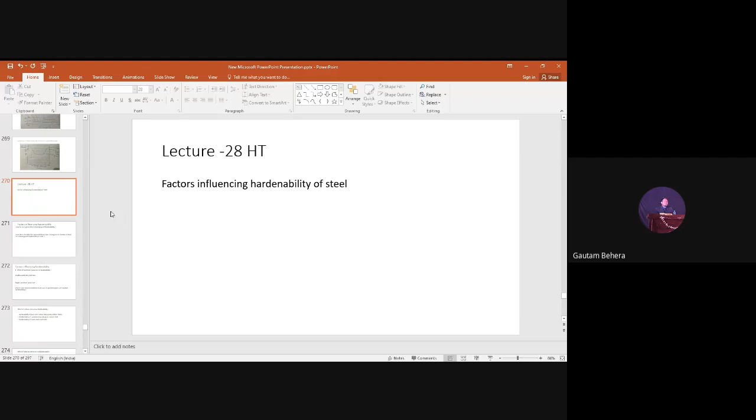So first, how do we say a given steel has good hardenability? Suppose I hand you a steel and ask you to tell me whether it has good or poor hardenability. Obviously the first thing you have to do is take the steel to the austenitizing temperature, meaning you convert the entire initial microstructure into a homogeneous austenite phase.

After that you have to cool it. It depends—you can give quenching, slow cooling, or intermediate cooling, and then check the microstructure from the surface to the center. You can make cross sections, cut it into pieces, take sections from the surface, intermediate portions, and center portions, and check whether martensite has formed everywhere—at the surface, intermediate portions, and center.

That means I can say the steel you received from me has good hardenability—it is showing good hardenability characteristics.

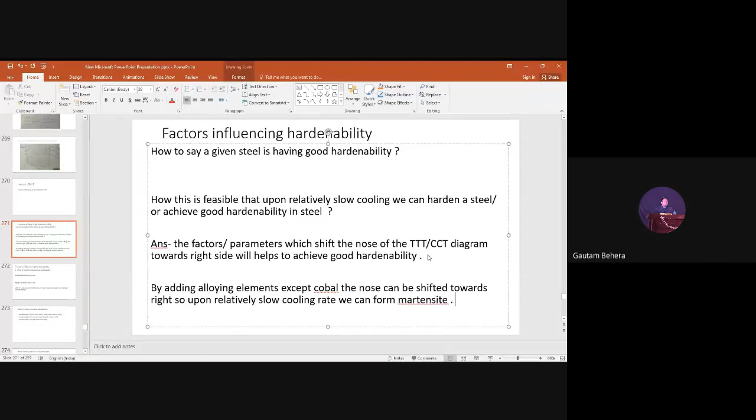So in other words, what I can say in terms of this critical cooling rate - will it become slow or high if you are adding lots of alloying elements? Slow. Yes, obviously the critical cooling rate will become slow because the nose is moving towards the right side. So if you draw a cooling curve, it will not easily touch the nose of the curve, because once it touches and crosses the nose of the curve, then transformation of austenite to perlite may happen. So we have to suppress the perlitic formation also.

Okay, so next is factors influencing hardenability. First is the effect of austenite grain size on hardenability. This is one of the important factors that affects hardenability. We have an initial microstructure and we convert it to austenite first. In most heat treatment, our first job is to take the steel to the austenitic temperature to make it homogeneous austenite. Austenite basically starts nucleating at the interface of ferrite and cementite if present. So more surface area means more rate of nucleation of this particular thing.

So how does austenite grain size affect hardenability? We can have smaller austenite grains, or we can have bigger or coarser austenite grains - that's the technical term. If we have smaller austenite grain, the hardenability will be poor. But if we have coarser, bigger austenite grain, we have good or high hardenability.

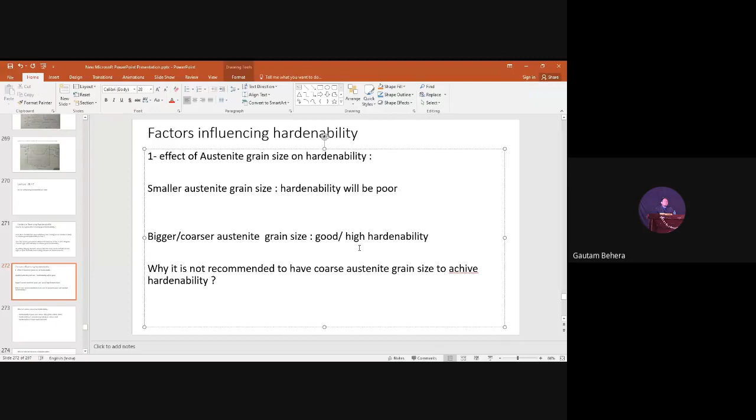So if perlitic transformation is easier, austenite will easily transform into perlite, which suppresses the formation of martensite. Similarly, if we have coarser austenite grain size, that means we have fewer grain boundaries, very minimum grain boundaries. So perlite transformation will be suppressed and martensite transformation will be easy. So in one word I can write...

Nucleation and growth easy - it suppresses transformation of austenite to martensite. The same answer you can write here.

Then next question: why is it not recommended to have coarser austenite grain size to achieve good hardenability? So what's the conclusion? If we want high hardenability characteristics in the steel, then we have to go to a high temperature, because that gives us coarser austenite grain, and with coarser austenite grain, transformation of austenite to martensite will be easy, because the suppression of austenite to perlite transformation will occur due to the coarser grain size.

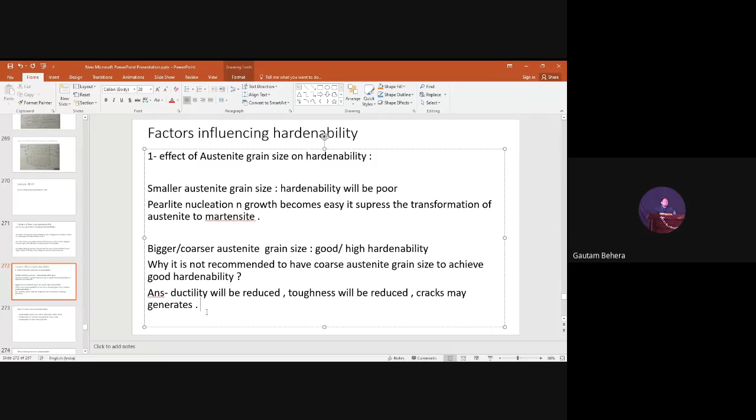Is it okay now? Okay, sir. Okay. Sir, yes.

Sir, if we have problems with both fine grains and coarser grains, then what can we do? When I told you about grain size, yes sir, you can have an optimum grain size so that you can maintain both properties. You can maintain toughness also, you can maintain hardness and strength also.

See, you understand, strength and ductility are always opposite. If you always want to increase the strength, what will be the problem? The ductility will be reduced, and that will affect the toughness property. Obviously, the final service application is important, because, for example, car bodies, right? In car bodies, you always want high toughness and high strength also. So that is why you have to maintain a fine grain anyhow.

It is okay, you have to maintain a fine grain over there. If you are not maintaining fine grain, if you are maintaining coarser grain, ductility will be reduced and toughness will be decreased. But on the other way, if you are increasing high strength, the chances are that toughness will also be reduced. So depending upon the application area, actually we want different things.

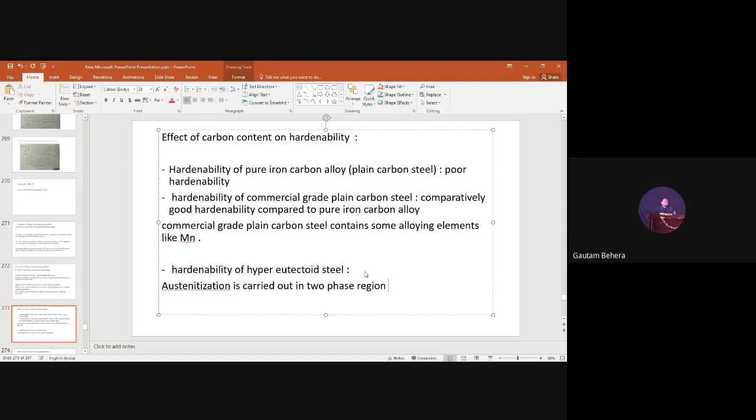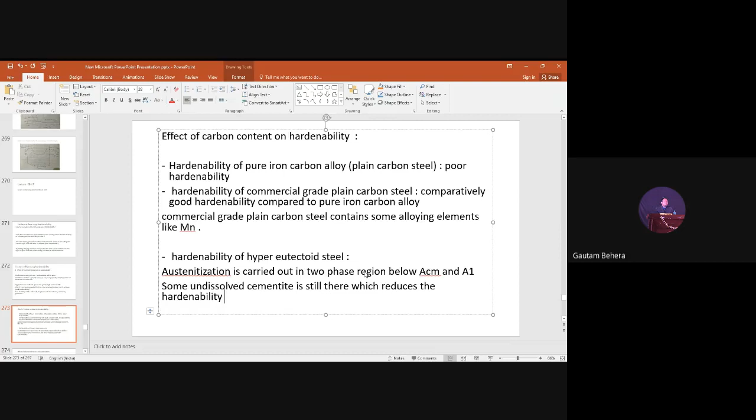Austenitizing is carried out in two-phase region, that is below ACM and above A1. That means in between the lower critical temperature and upper critical temperature, that is ACM. So some undissolved cementite will be there. Carbide, that is iron carbide, is still there, which reduces the hardenability. This is the answer.

Next is the effect of alloying elements on hardenability. We have already discussed this: except cobalt, other alloying elements present basically shift the nose of the CCT curve or TTT curve towards the right side. So even doing relatively slow cooling, we can easily get martensite, so we can have good hardenability characteristics. That is the answer.

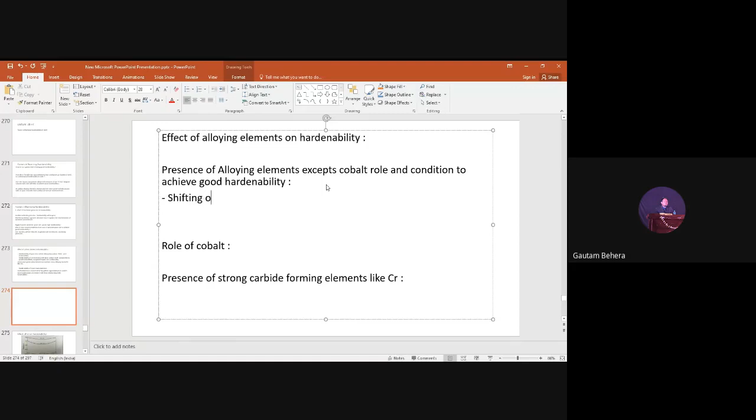So presence of alloying elements except cobalt is the role and condition to achieve good hardenability. One point is the shifting of the nose of the TTT curve or CCT curve towards right. That is the answer.

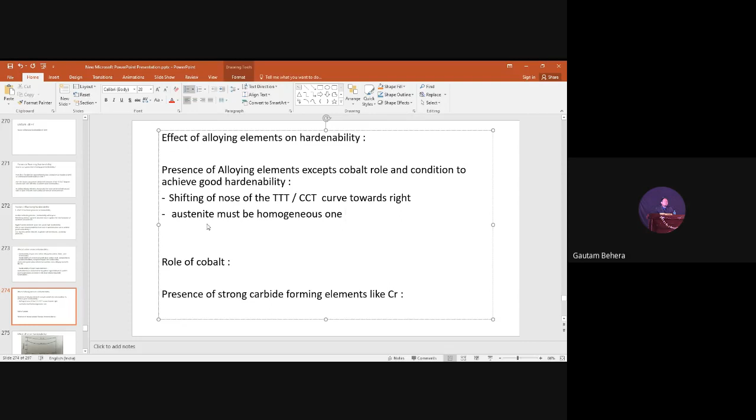Second answer is: then it is written as condition to achieve. It doesn't mean that you have alloying elements in the steel except cobalt and you are automatically getting high hardenability. That is not the thing. The other important point to notice is whenever we are doing austenitization, this austenite should be homogeneous. If it is not homogeneous, and some alloying elements are there which form carbides, nitrides and all - if there are any ferrite stabilizers like chromium, niobium, vanadium, titanium, they form strong carbides and are not easily soluble in the austenite phase. Even if they are soluble, the solubility is very slow. So if the austenite is inhomogeneous, hardenability will be poor.

In other words, I can write: inhomogeneous austenite reduces the hardenability of the steel.

The reason you understand, because of the strong carbide nitrides or any non-metallic phases will be there which are not soluble easily, or it is taking time. So austenite becomes inhomogeneous. Then role of cobalt.

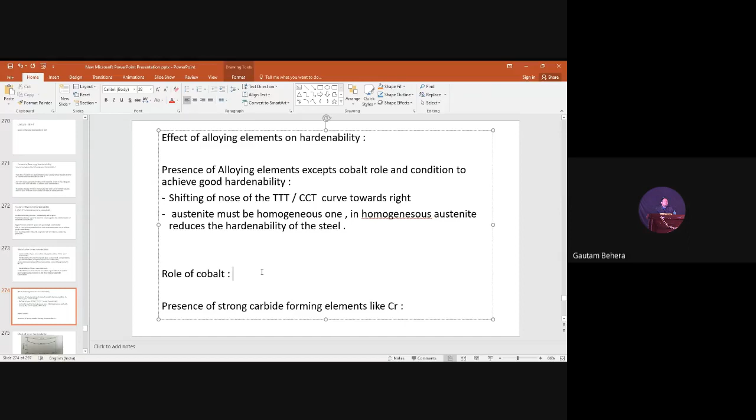Cobalt, already I told you, is the exception which does not shift the nose of the TTT curve, CCT curve, towards right. So if cobalt will be present, what I can write? Here I can write first thing is it does not shift the nose of TTT.

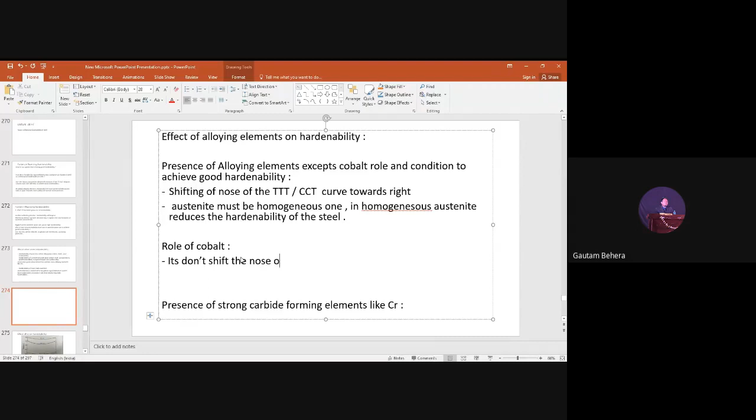And what happens also, due to which it promotes the nucleation of pearlite, nucleation and growth of pearlite.

So you understand what I can write? Martensite transformation suppressed, because pearlite formation will be there, so martensite transformation will be suppressed. So if cobalt will be there, if you have a steel containing only cobalt, it will never shift the nose of the TTT curve towards right.

So that we cannot easily get martensite upon slow cooling. That is one part. Second part is this cobalt also helps in the nucleation and growth of the pearlite phase, which is a diffusion based transformation. So if diffusion based transformation starts, martensite formation will not be easy, or it will be difficult, or it will be suppressed. This is the answer.

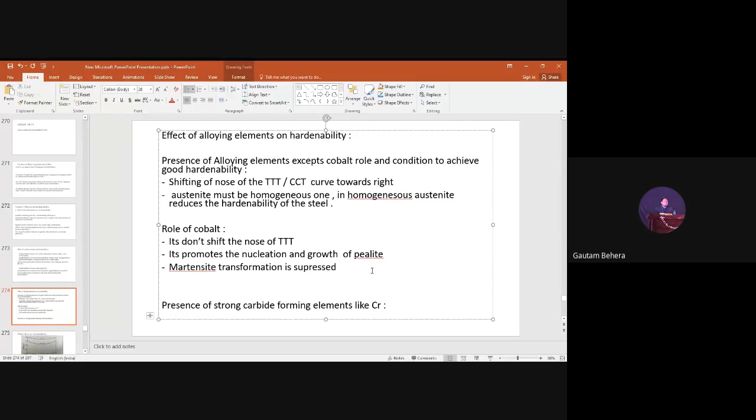If vanadium, niobium, it requires very high temperature to make it soluble. Or once it becomes soluble, it takes more time to get homogenized also. So presence of strong carbide forming elements like chromium suppresses the hardenability or makes the hardenability poor.

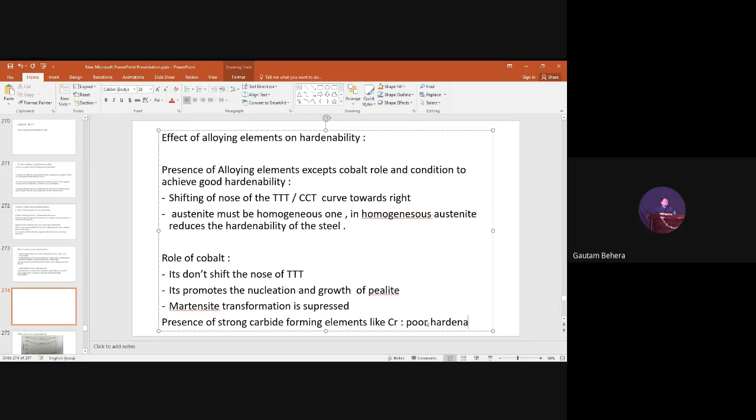So let me show you an image. Let me write the reference here. Reference is Heat Treatment Principles and Techniques by T.V. Rajan, C.P. Sharma and Ashok Sharma.

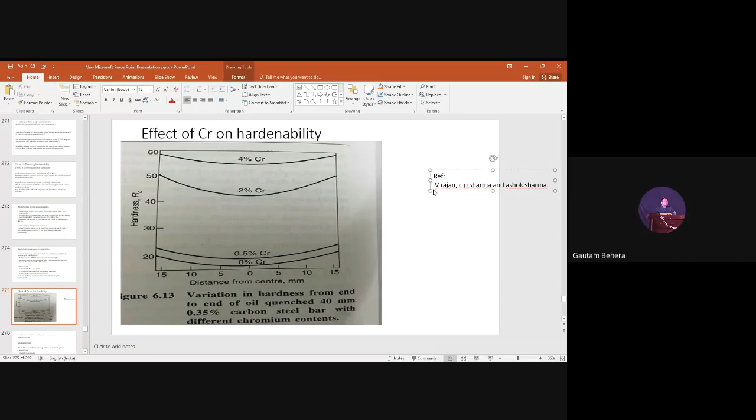So if people just look at this one and tell me what is happening. Let me see, you can answer. So with increase in chromium percentage, hardness increases. Okay, fine. That is the only part you can able to see. Anything else?

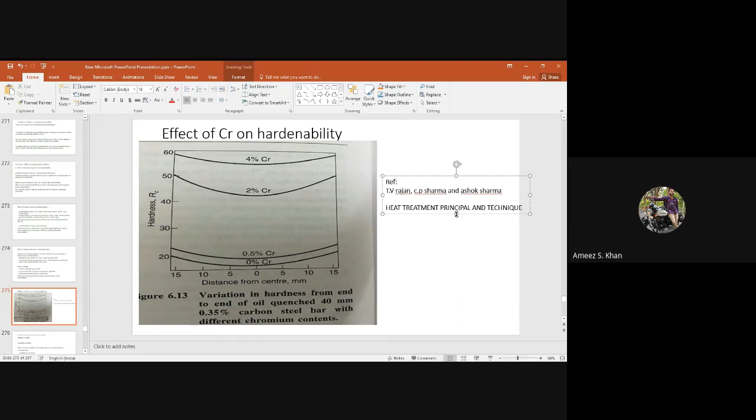Hardness is varying from top to center and then increasing from center to the other end. That is fine, that is you are talking about the depth and distribution of hardness. But tell me on the basis of chromium, what is happening? As someone told, the hardness is increasing, obviously, because carbide will be there, so the strength will increase. They prevent the motion of dislocation.

2% chromium decreases the hardenability. Okay, fine. So in other words you can see this first one, when there is 0% chromium in the carbon steel, the variation of hardness from the surface to the center is not so high. It is nearly uniform or close to that, comparable. But again, if you have 0.5% chromium, it is somewhat comparable, the surface hardness and the core hardness are comparable.

But the moment you increase the chromium to 2%, you can see there is a huge difference. The hardness at the surface and the hardness at the center differ a lot. If you draw a straight line connecting this, you can see there is a much gap. Similarly, if you increase more chromium percent, again you can see there is a much difference. So that means with increase in chromium percent, the hardenability is decreasing.

Because the depth and distribution of hardness is not same everywhere due to formation of more chromium carbides or strong carbide forming elements, which are basically not dissolving into the austenite easily. And even if they are dissolving, the homogenization of austenite is not happening easily, it is taking much time. So this is the answer.

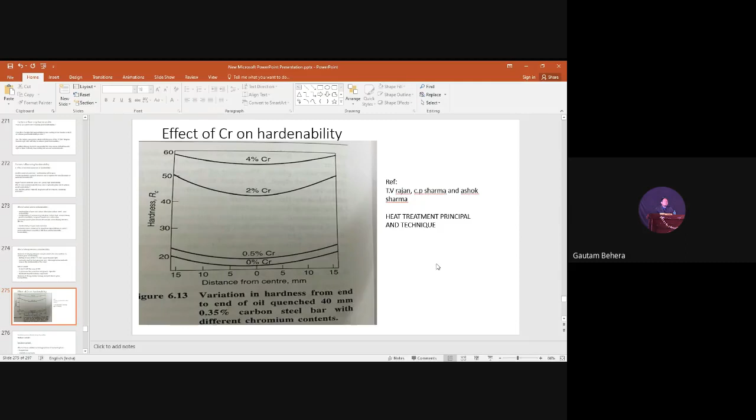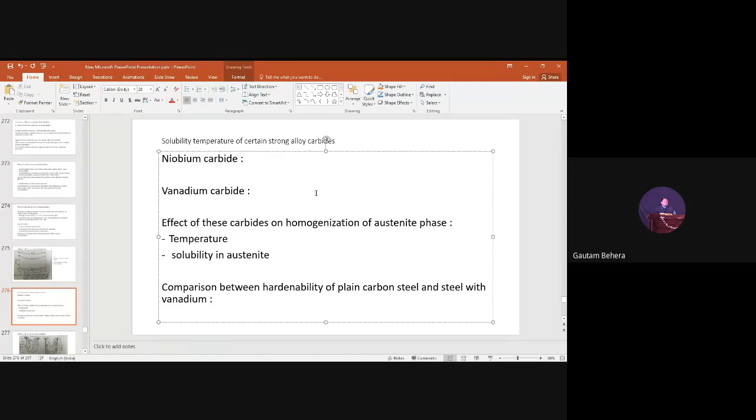Now there is a concept here, as I told, solubility temperature of certain strong alloy carbides. So as I told, they are ferrite stabilizers which basically form strong carbides. The best example is niobium carbide and vanadium carbide, and titanium carbide also. They are very stable carbides, they do not easily get soluble in the austenite phase, they require very high temperature. So here basically we are talking about niobium and vanadium.

If you remember, whenever in that part when we are talking about HSLA, high strength low alloy, that is the concept now, because we are getting finer grains over there. The strength is high, toughness is also good, it is also providing good corrosion resistance. Anyway, so niobium carbide and vanadium carbide, it is 1150 degrees centigrade.

Anyway, at 1050 degrees centigrade, this niobium carbide is still stable up to this temperature, and vanadium carbide is still stable at this temperature too. But basically we do austenitization at a temperature of suppose 950, 850, or 900 degrees centigrade. That means even at austenitizing temperature, this carbide will still be there. So what will happen? If they are still there, they will prevent the growth of the austenite phase, so austenite grain formation will be very small, finer austenite grain will be there.

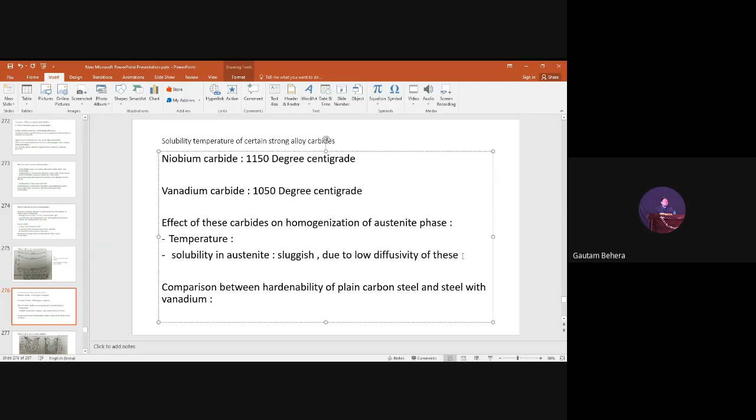Then comparison between hardenability of plain carbon steel and steel with vanadium. So this is a question from my side: can you people tell me, if you have a plain carbon steel, and on the other hand you have a vanadium steel, the austenitizing temperature is fixed for them - in which case can you get high hardenability, or in which case can you get low hardenability, and why?

Here we basically want to compare between the plain carbon steel and steel containing vanadium. This is a very critical question. In the earlier part, we have seen if we have a plain carbon steel, alloying elements are absent, the nose of the TTT curve will not move towards right, so hardenability will be poor. And again, vanadium forms strong carbides which are not easily soluble, and even if they become soluble, homogenization will not be easier, it will take time, so hardenability will be poor. So now there is a very good confusion between them - how can you compare this? Where do you get high hardenability, where do you get low hardenability, or will you get the same hardenability?

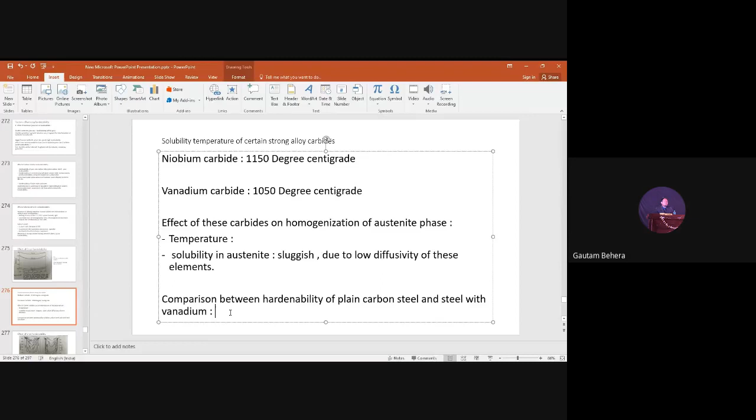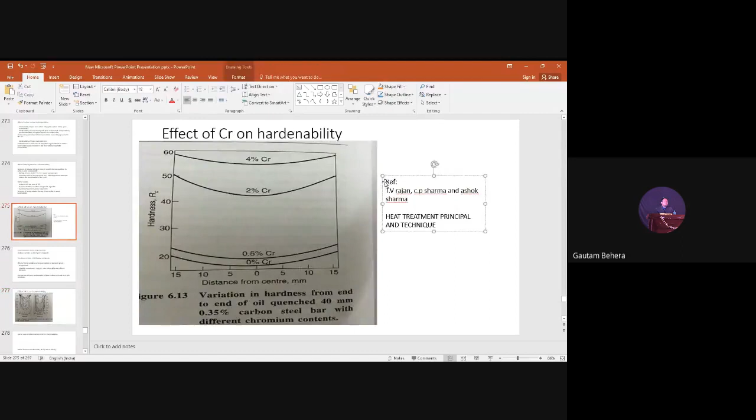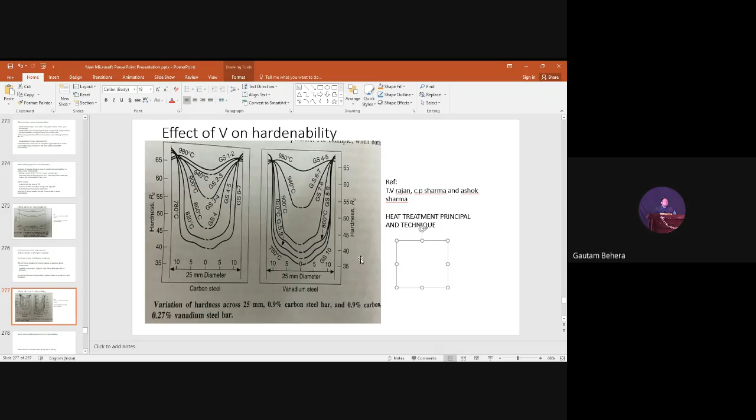Okay, can you tell me what is the reason behind this? Already I have given you some hints here. What may be the reason? Patnaik, can you answer this one? What is the reason behind this? Susri Debasmita, can you answer? What is the reason behind that plain carbon steel has high hardenability here if we compare it with the vanadium steel?

Shweta, you want to speak something on this? Can you tell me the reason? No sir, I don't know. Because of grain size, I am writing. Now can you explain? Just look at the grain size. At 900 degrees centigrade, what is the grain size here and here? Sir, because grain size is finer in vanadium, it is coarser. In carbon steel, it is finer or coarser?

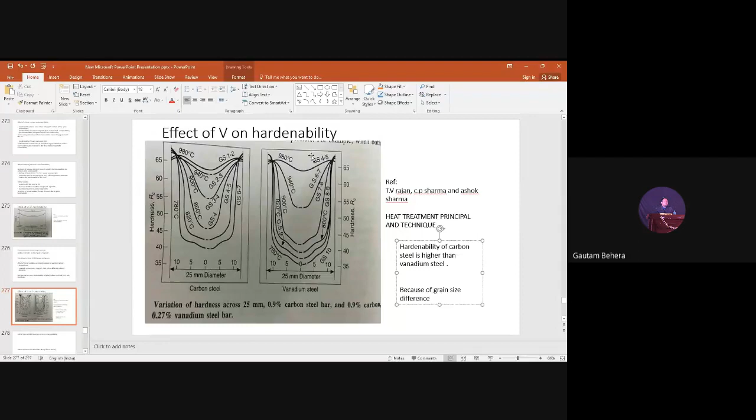At same temperature, 900. Sir, it is coarser. Coarser in case of carbon steel. Yes, very good. So how you got that, by looking at the figures? Yes sir. Can you elaborate? Can anybody want to elaborate this one, how by looking at the figures you can say which one is coarser or finer?

Okay fine, you can see it is grain size 4, 5, but here grain size 1, 2. That means 4, 5 means grain size number is bigger, so grain is finer. Here grain size number is small, so grain is coarser. So because of vanadium, we have vanadium carbide, and vanadium carbide prevents the grain coarsening. So grain size will be finer, so hardenability will be poor. But here in case grain size will be bigger, so hardenability will be higher. So this is the answer.

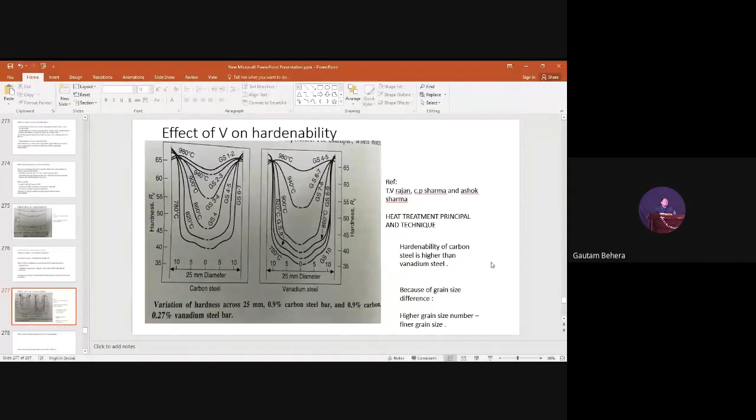Okay, last part, the role of non-metallic inclusion in steel in hardenability. Non-metallic inclusions, if you remember, may be oxides, or sulfides, or silicates, or complex oxides like that. They basically prevent the coarsening of the grain. So once they prevent the coarsening, the grain will remain finer. So if we have very fine inclusions, non-metallic inclusions like below 10 micrometer or 10 micron, and there is a uniform distribution of these non-metallic inclusions like oxides, sulfides, silicates, or complex oxides, there is a refinement in the grain size. So what will happen, if the grain size will be refined, smaller grain size, hardenability will be poor, like that. You can answer poor hardenability.

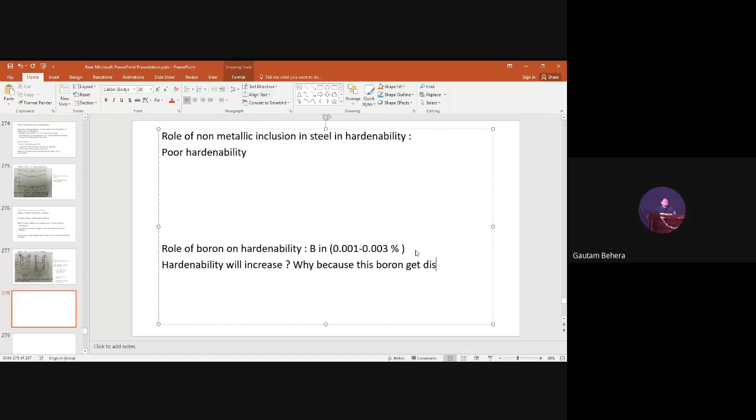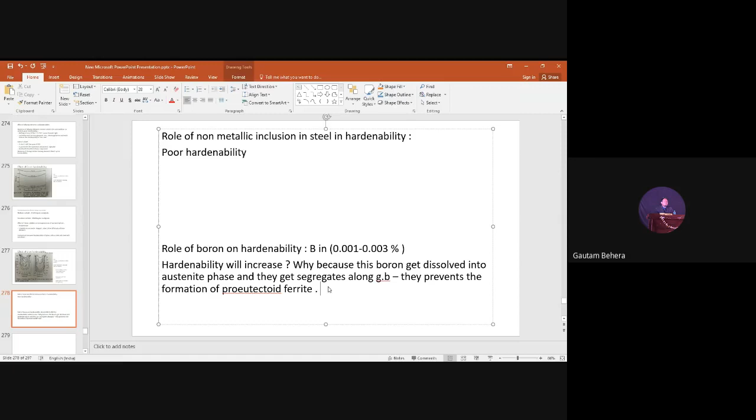And second one is role of boron on hardenability. Actually, if boron amount is present in very less amount, very minimum, hardenability will increase. Why? Because this boron gets dissolved into austenite phase, and they get segregated along grain boundaries. So what happens to the boron? This boron, when added in a small amount, becomes soluble in the austenite phase, and gets segregated along the grain boundaries. So once they get segregated, they prevent the formation of pro-eutectoid ferrite. So once pro-eutectoid ferrite is prevented, that will help in the hardenability of the steel. So okay, this part is clear. So I'll end the lecture here.